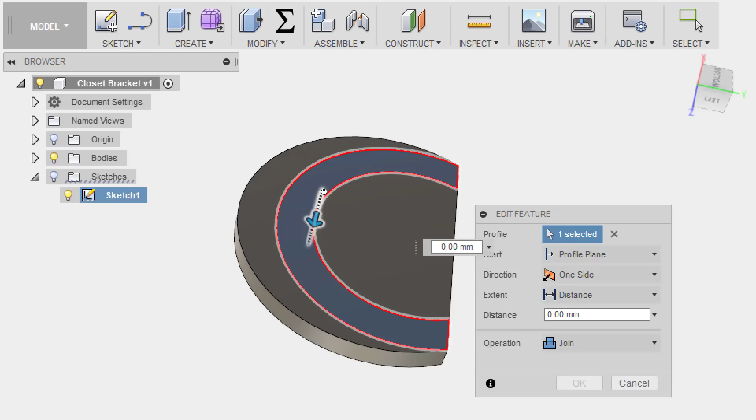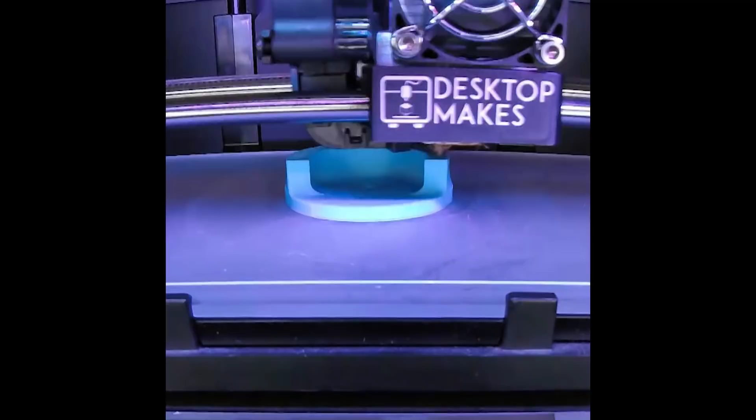So of course what I did was I jumped into Fusion 360, quickly modeled something up that I sent to my Replicator 2, printed this at 0.3 millimeters and popped it right out. It actually printed in less than an hour, it was like 40 minutes or so. Screwed that in, and voila, I've got a new bracket in place without ever having to even leave my house.

And we hung all the clothes back up. Well, actually she did, and she was very happy with the work.

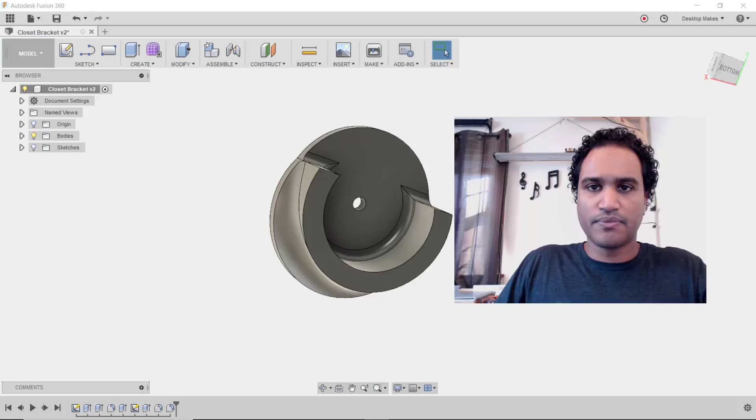I'll walk through the approach that I took in designing this bracket, and this was one that I just kind of jumped right in and figured it out as I went along, which honestly is the way that I tend to approach most designs, at least for that first iteration where I'm trying to figure things out.

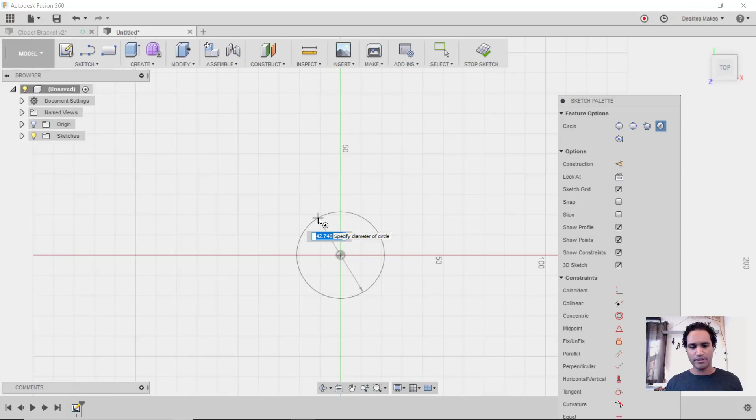So we'll create a new design, and I'll start with a sketch on the XY plane, and we'll begin with a center diameter circle. I'll hit C for circle on my keyboard, and the diameter for this is going to be based off the pipe. I measured the pipe at 33.5 millimeters, but I want to give myself a few millimeters of room to play with here. I don't want it to be really tight, I just want it to sit on this bracket. So I'm going to make this 37 millimeters and hit enter.

And I'm going to draw another circle here, and this is going to be sort of an outer circle to give this some thickness. And I'm going to make this one 50 millimeters. Now 50 just because that looks right. Remember, you can always grab these dimensions and move them.

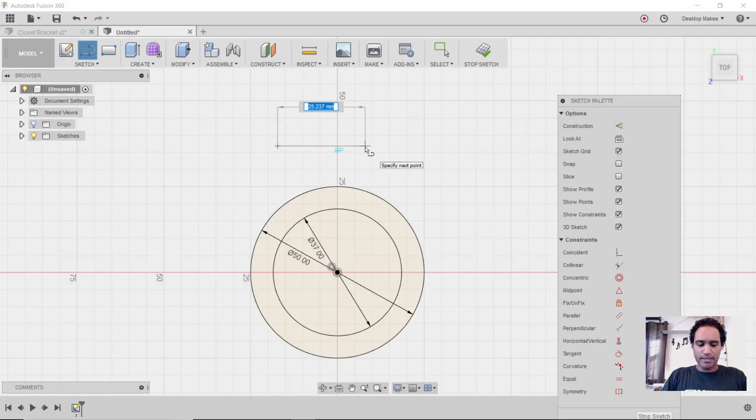Now the way I want this to work is I want the pipe to slide in through the top. So I'm going to create another line here, L for line, and this is going to be drawn horizontally. And I'm going to make this 34 millimeters, 34 because again the pipe measured at 33.5, and I'm giving myself just a half a millimeter of room here to slide in. And I'm going to hit enter.

Next I'm going to grab my coincident constraint and constrain this point here to this circle, and constrain this point as well to the same circle. I'll hit escape, and now I have this line constrained to that inner circle, so I can actually grab it and move it around anywhere and it's going to stay constrained. But I do want it to be horizontal, so I'll grab my horizontal constraint, click the line here, and that's going to make it constrained.

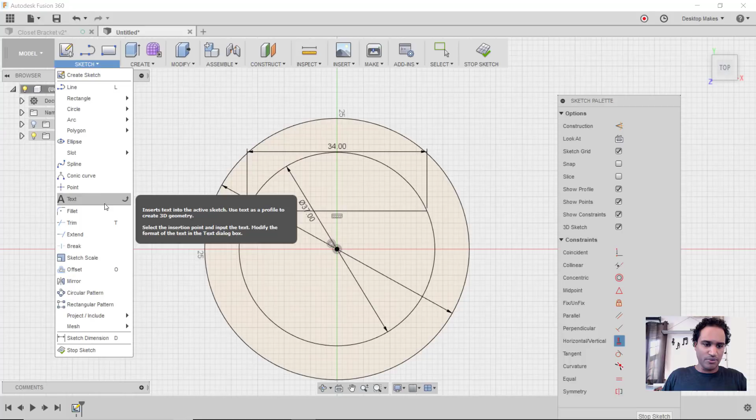So now I'm going to grab my extend tool from the sketch menu, because what I want to do is extend this line out to that other circle, that outer circle. Now if I hover over this line, it'll extend that point there, and it'll do the same thing to this point as well. Notice that it turned blue, so I lost my constraints there.

So I want this line to be locked in that location. So I'm going to hit D for dimension, and I'm going to dimension it between that origin point. So I'll click the line and the origin, and I'm just going to click and hit enter, and that's going to lock it in place.

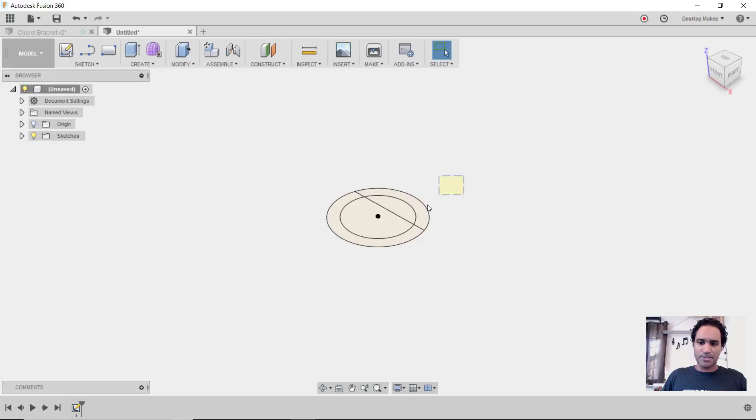Okay, now I'm going to hit stop sketch, and let's give this some thickness. So I'm just going to select the entire thing, E for extrude. Now I'm going to extrude this down -4 millimeters, hit enter. I'll go back to my sketch and bring that in, so I'll turn on that light bulb. And I'm going to grab this bottom portion here, E for extrude, bring it up, and I'm going to go 17 millimeters.

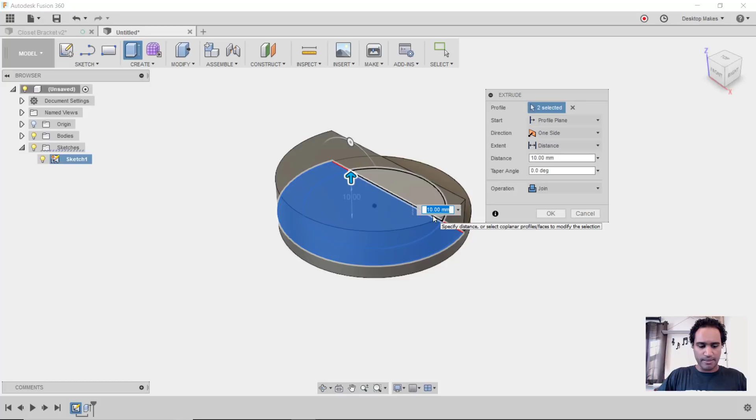We'll type that in. Whoops, let's redo that. I'm going to hit escape, E for extrude, select this, start dragging it up, and do 17 millimeters just because that looks right.

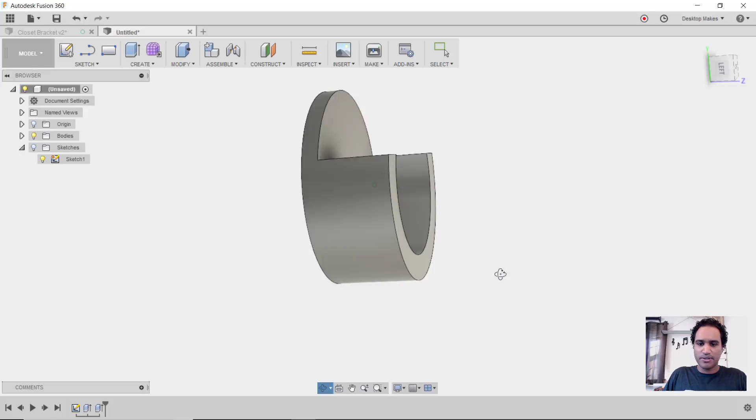Okay, so now what I have here, I can print this and see how well it'll work, but I'm not going to do that because I can tell you that this is looking a little weak. There's not much support here. If I hang the pole with all the weight of the clothes, it'll probably just snap off. So let's give this a little bit of bulge on the bottom here to give it some strength.

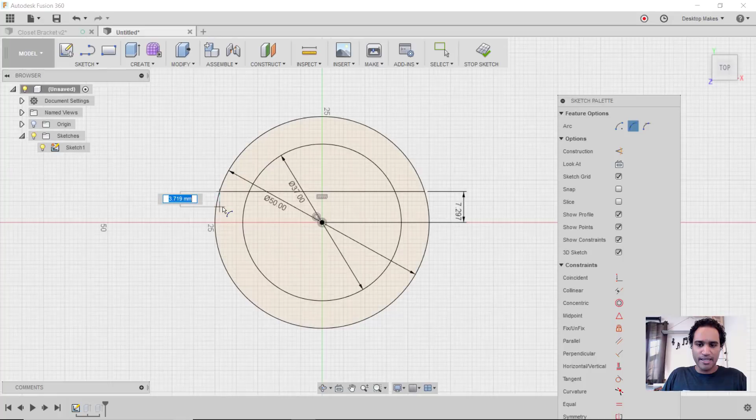So the way I approached that is I just went back to that original sketch here on the timeline. So we'll double click that. And I'm going to grab my arc tool. So I'll go to sketch, down to arc, 3-point arc. And I'm going to start here at the intersection between that line and this outer circle. And we'll click, our second point will be that other intersection here.

And then I'm going to drag out to give this a bulge. So we're releasing our mouse and dragging out. And I'll click again, just to where it looks right. And if we want to be precise, we can just hit escape and then hit D for dimension, and then I can click on that arc and we can give that a radius. So I'm going to click and just enter 27 as the radius.

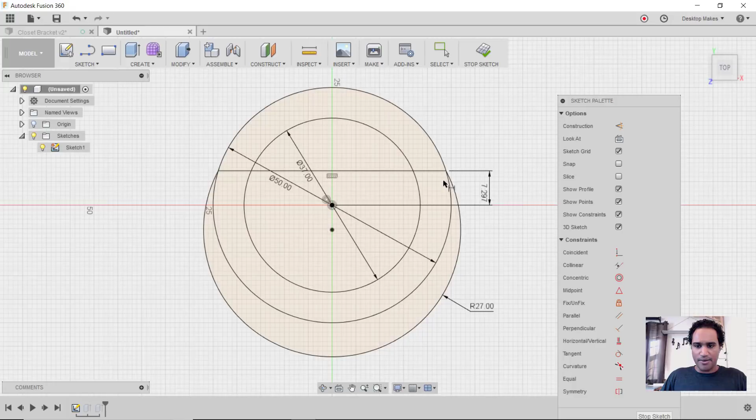And now I have this bulge here. I'll click stop sketch, bring in that sketch so we can see it. E for extrude, and I'm gonna take that profile and drag it back again -4 millimeters so it matches the thickness of our original shape there.

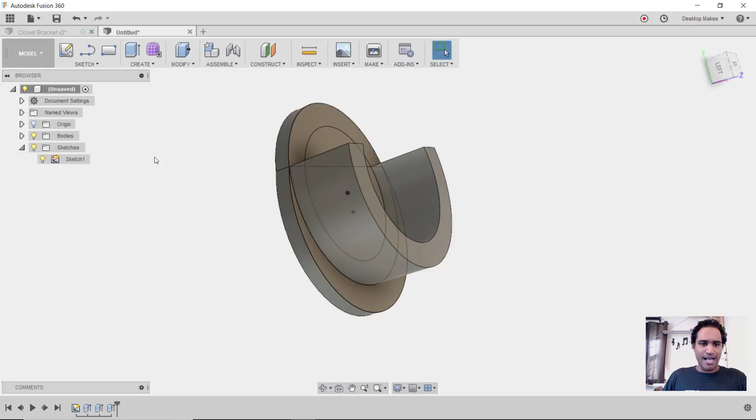Now I'm gonna just fillet this out. So we'll go to modify, fillet, and I'll grab that bottom edge and just bring this out. I'm just gonna go with a really big fillet here. So 30 millimeters looks good, and I'm gonna click OK. So there's our bracket so far, and that's looking a lot better. So we have a lot more strength here on the bottom.

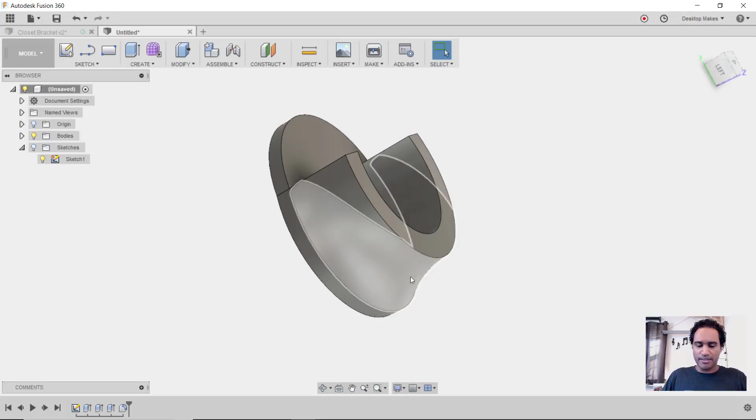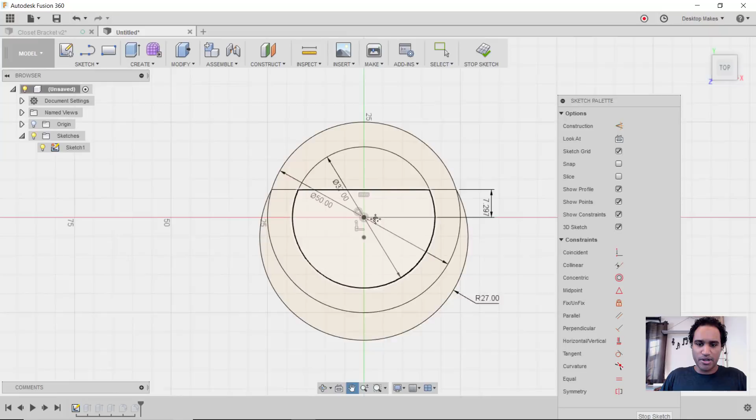And I'm also going to fillet this inner edge here, just to give it a little more strength, click OK. And then the last thing I'm going to do is add a circle here so we can have our screw hole. So I'm going to go back to that same sketch in our timeline here, double click, C for circle, and we'll draw a smaller circle here. This will be based off of the size of screw you're going to use. I'm going to make mine 5 millimeters and hit enter.

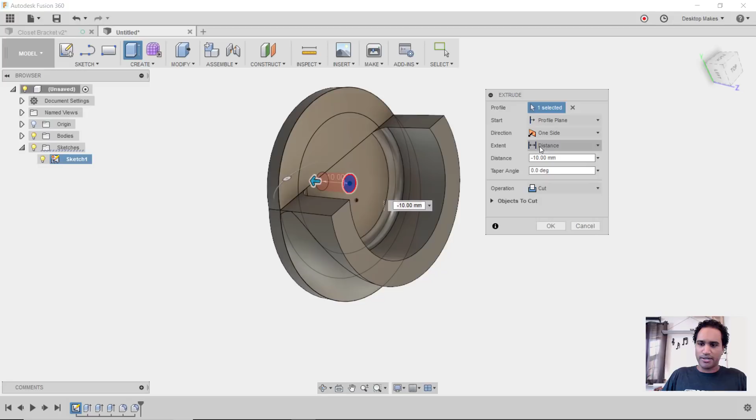Stop sketch, bring in that sketch, E for extrude, and I'm just going to select that profile, drag it out, and for extent, I'm going to choose all. Click OK. And let's get rid of that sketch. So that's looking good. To make this even a little stronger, I'll go ahead and fillet these two edges here. So F for fillet, and I'll make that 3 millimeters and click OK.

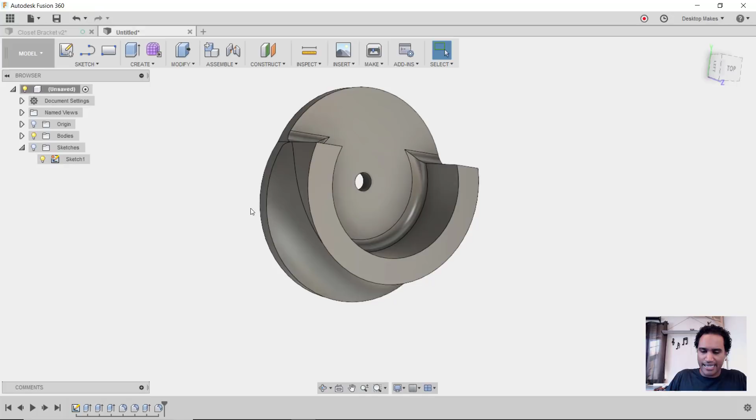All right, so that's basically what I went with. Just a quick, simple design to get the job done. Do I think this will hold up? Yeah, I'm pretty confident. I think the fillet there on the bottom will be just enough to give it the strength it needs to hold the weight of the clothes.

Plus, I also performed a very scientific test of just pulling down on it and seeing if I heard any cracking or bending taking place, and it seemed to do okay. So we'll see. If it does break, we'll take a look, analyze it, and see how we can reprint it to be stronger. This is what it's all about.